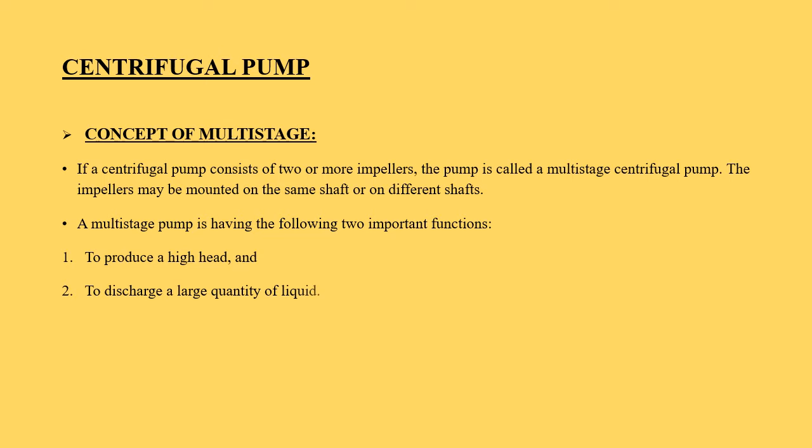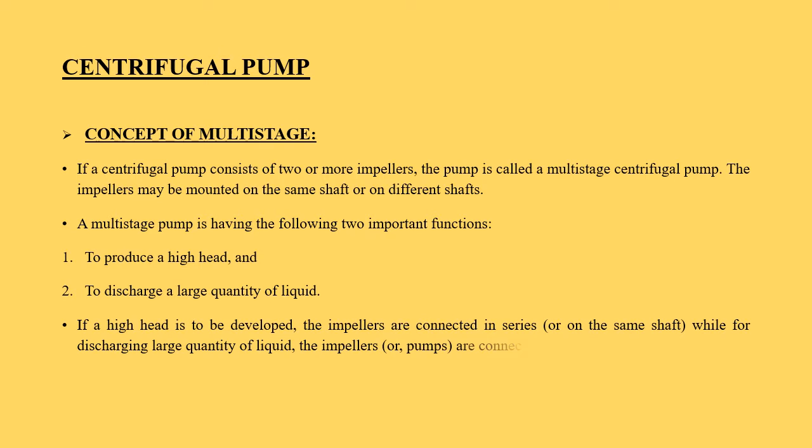A multi-stage centrifugal pump consists of two or more impellers, which may be mounted on the same shaft or on different shafts. It has two important functions: to produce a high head and to discharge a large quantity of liquid. If a high head is to be developed, the impellers may be connected in series, and for large discharge, the impellers may be connected in parallel.

For developing a high head, a number of impellers are mounted in series on the same shaft, as shown in the figure. Water from the suction pipe enters the first impeller at inlet and is discharged at outlet with increased pressure. This water then enters the inlet of the second impeller through a connecting pipe, and at the outlet of the second impeller, the pressure will be more than at the outlet of the first impeller.

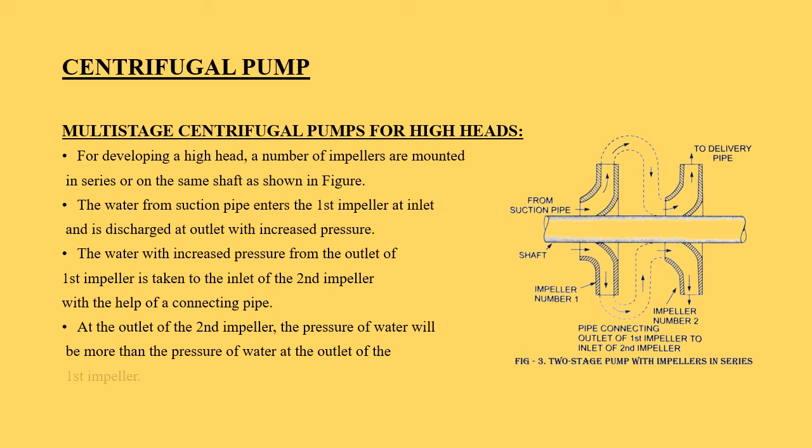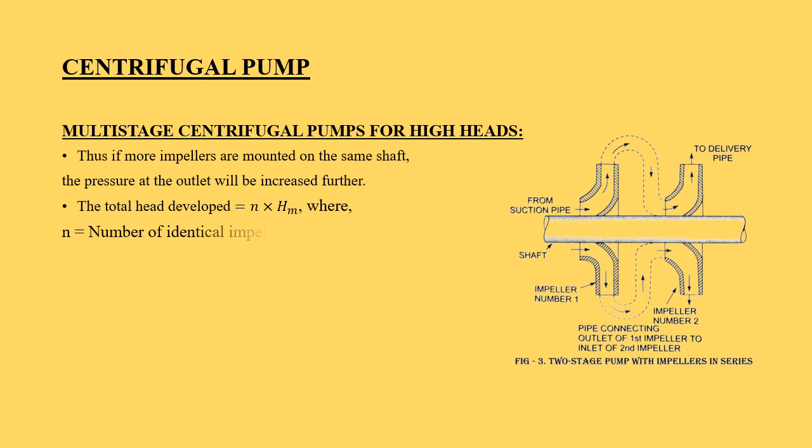If more impellers are mounted on the same shaft, the pressure at the outlet increases further. The total head developed is equal to n into hm, where n is the number of identical impellers mounted on the same shaft, and hm is the head developed by each impeller. The discharge passing through each impeller is kept constant.

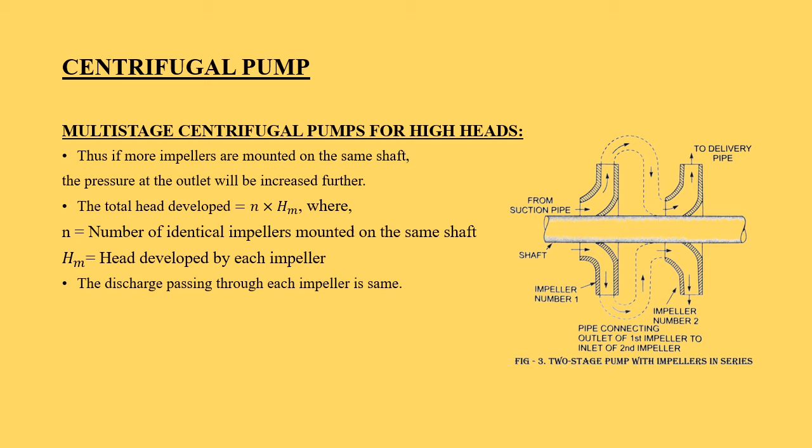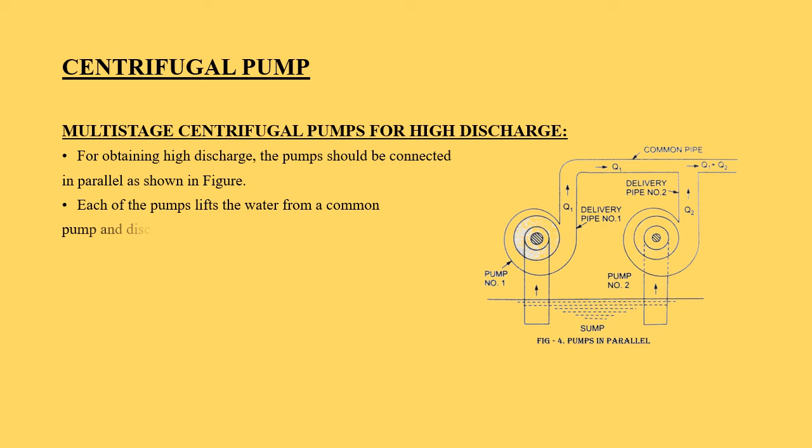To obtain high discharge, pumps should be connected in parallel, as shown in the figure. Each pump lifts water from a common sump and discharges water to a common pipe to which the delivery pipes of each pump are connected. Each pump works against the same head. The total discharge is equal to n into Q, where n is the number of identical pumps arranged in parallel and Q is the discharge from one pump.

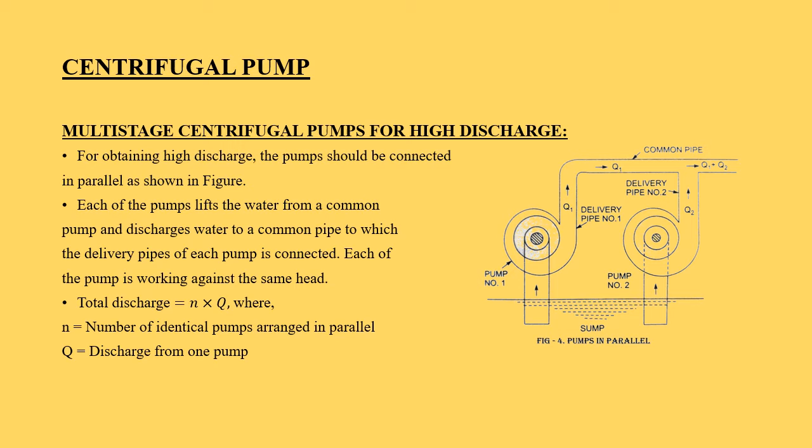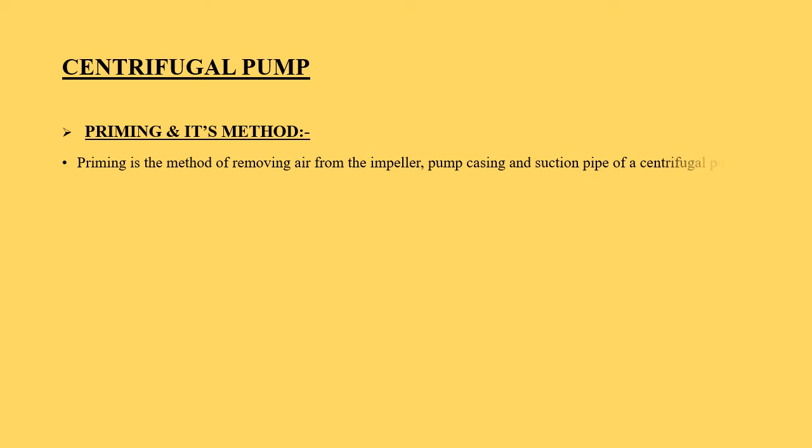What is priming? It is the method of removing air from the impeller, pump casing and suction pipe of a centrifugal pump. If it is not done, air will be left within the pump, and the atmospheric pressure will not be able to force the liquid to flow through the suction pipe into the impeller. So this method is necessary to work a pump satisfactorily.

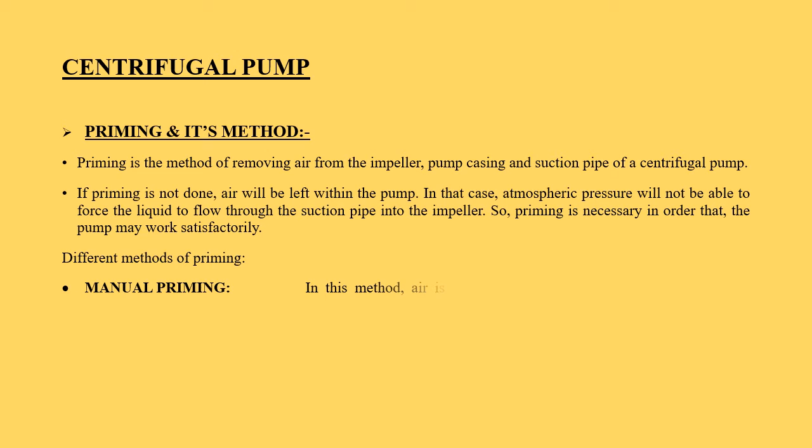The different methods of priming are manual priming, vacuum priming and self-priming. In manual priming, air is removed by pouring liquid into the pump casing until the liquid overflows from the casing. In vacuum priming, air is removed from the suction side of the pump by an ejector to create vacuum in the suction side. In self-priming, the air removing device is incorporated in the pump itself, and when the pump is started, this device starts removing the air from the pump.

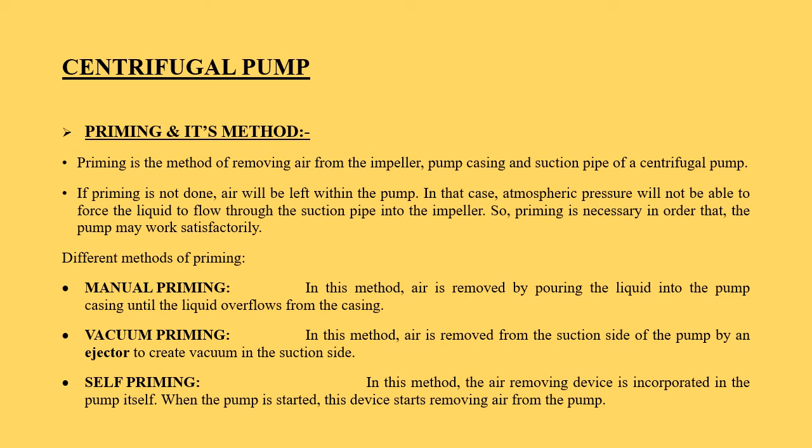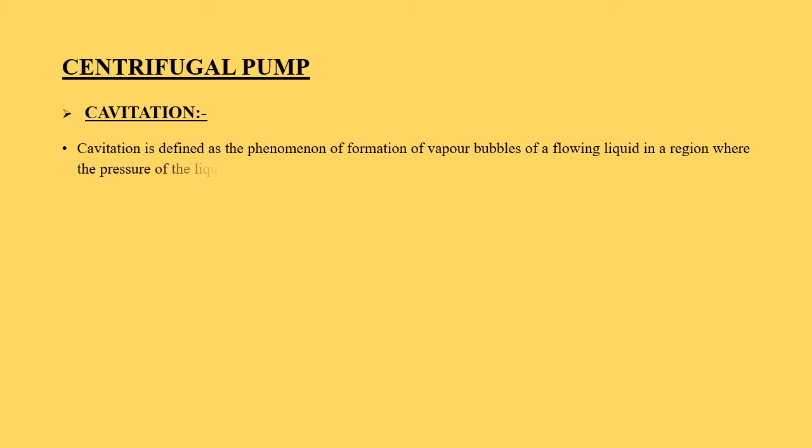Cavitation is the phenomenon of formation of vapor bubbles in a flowing liquid in a region where the pressure falls below its vapor pressure, and the sudden collapsing of these vapor bubbles in a region of higher pressure. When these bubbles collapse, a very high pressure is created, and the metallic surfaces subjected to this high pressure undergo pitting action, forming cavities on the metallic surface with considerable noise and vibrations.

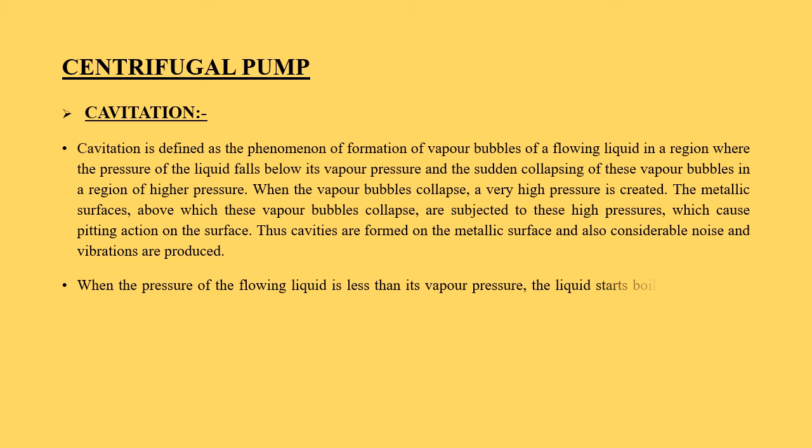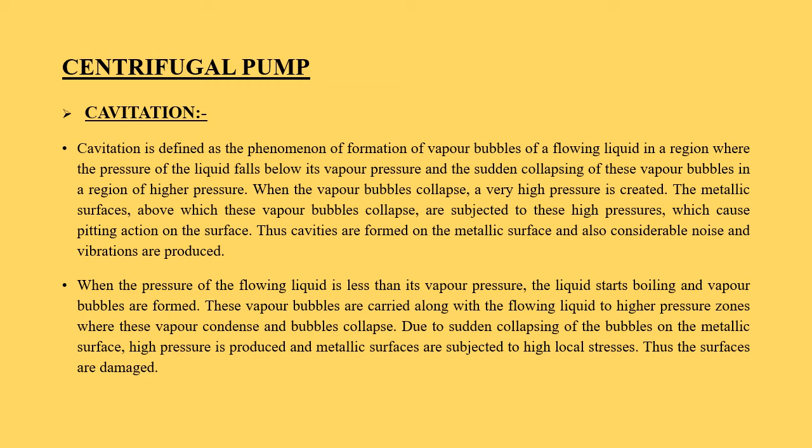When the pressure of the flowing liquid is less than the vapor pressure, the liquid starts boiling and vapor bubbles are formed. These bubbles are carried along with the flowing liquid to higher pressure zones where they condense and collapse. Due to sudden collapsing of the bubbles on the metallic surface, high pressure is produced and these surfaces are subjected to high local stresses, causing damage to the surfaces.

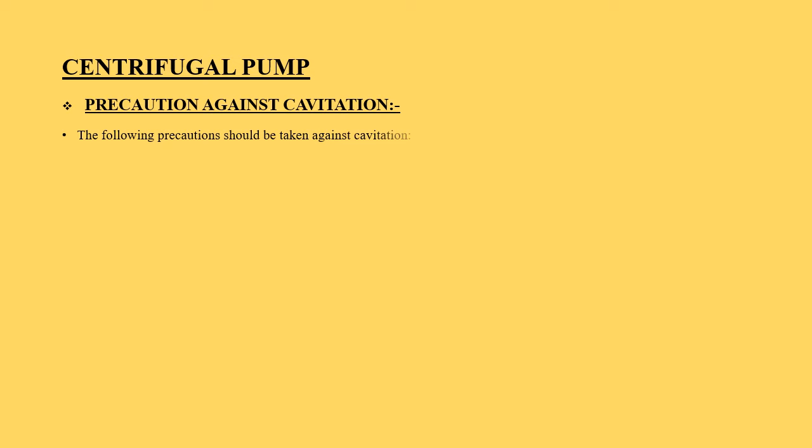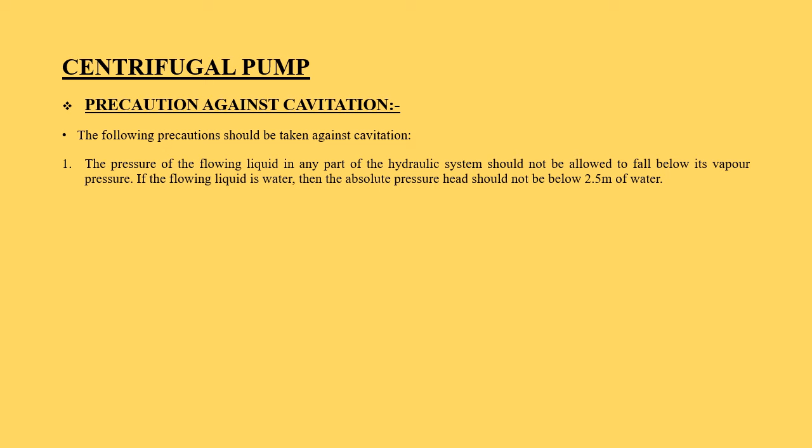Some precautions should be taken against cavitation, such as ensuring the pressure of the flowing liquid in any part of the hydraulic system should not be allowed to fall below its vapor pressure. If the flowing liquid is water, the absolute pressure head should not be below 2.5 meter of water. Special materials or coatings such as aluminium, bronze and stainless steel, which are cavitation resistant materials, should be used.

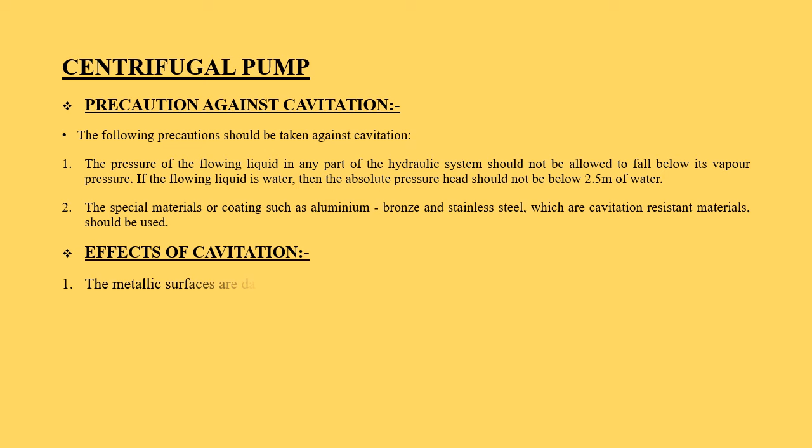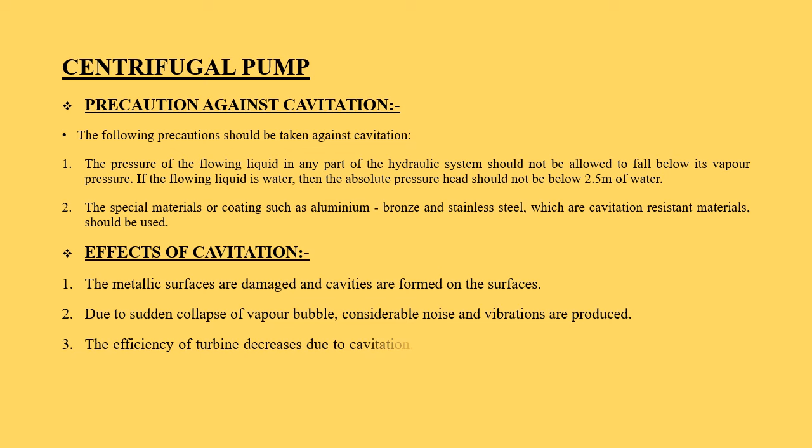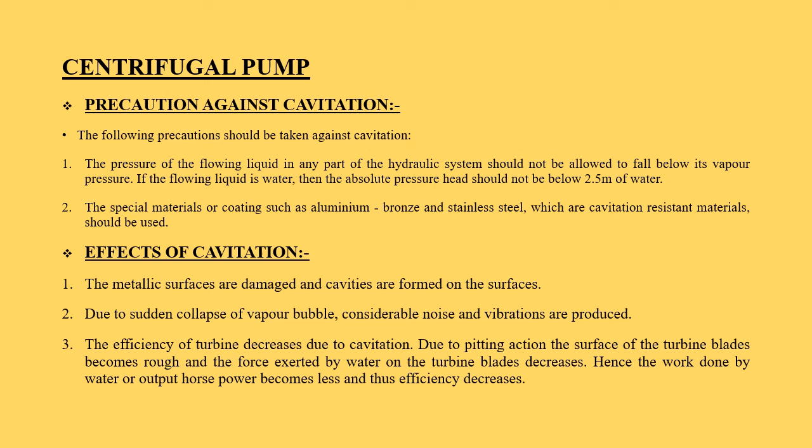The effects of cavitation are: metallic surfaces are damaged and cavities are formed on the surfaces; considerable noise and vibrations are produced due to sudden collapse of vapor bubbles; and the efficiency of the turbine decreases due to cavitation. Due to the pitting action, the surface of the turbine blades becomes rough and the force exerted by water on the turbine blades decreases. So the work done by water or output horsepower becomes less, and the efficiency decreases.

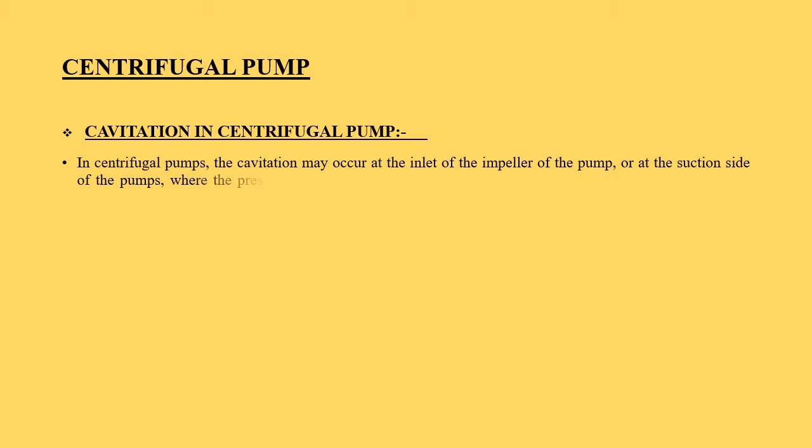In a centrifugal pump, cavitation may occur at the inlet of the impeller or at the suction side of the pump, where the pressure is considerably reduced. If the pressure at the suction side of the pump drops below the vapor pressure of the liquid, cavitation may occur. Cavitation in a pump can be noted by a sudden drop in efficiency and head.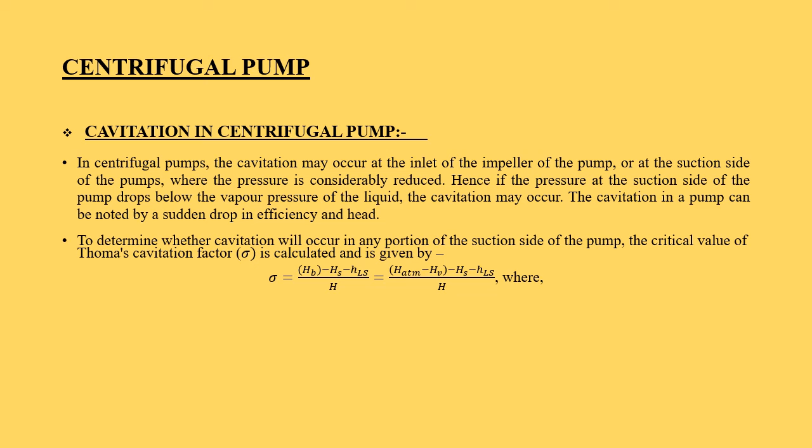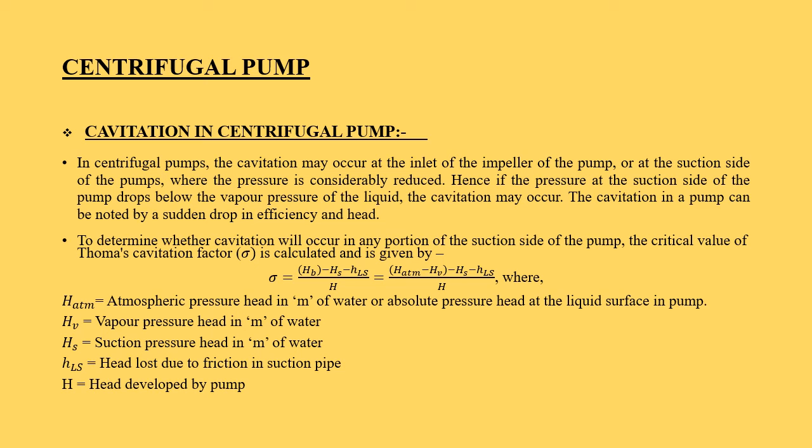To determine whether cavitation will occur in any portion of the suction side of the pump, the critical value of Thoma's cavitation factor, sigma, is calculated, given by sigma equals HB minus HS minus HLS, divided by capital H. Instead of HB, we can write H atmosphere minus HV minus HS minus HLS, divided by capital H, where H atmosphere is the atmospheric pressure head in meter of water or absolute pressure head at the liquid surface in the pump. HV is the vapor pressure head in meter of water, HS is the suction pressure head in meter of water, HLS is the head loss due to friction in the suction pipe, and capital H is the head developed by the pump.